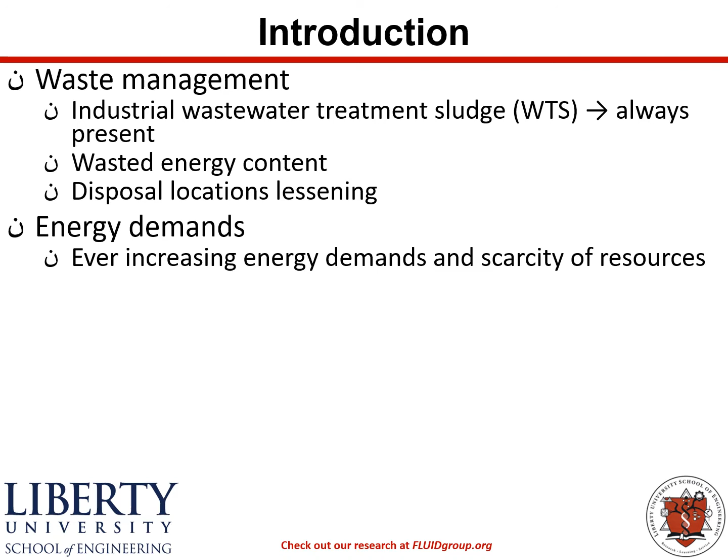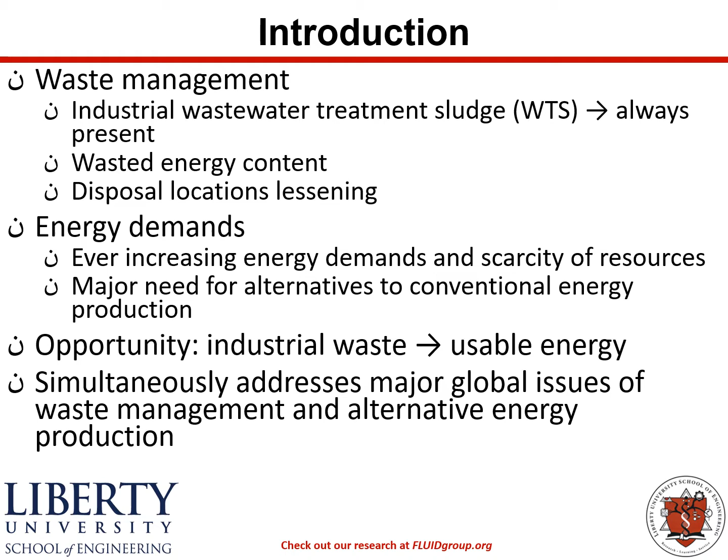Again, it should be no surprise that energy demands are another hot topic, with scarcity of resources, and we're always needing alternatives to conventional energy production. So this brings us to our main opportunity: industrial waste being used and converted to some form that would be a useful energy. This simultaneously addresses major global issues of both waste management and alternative energy production.

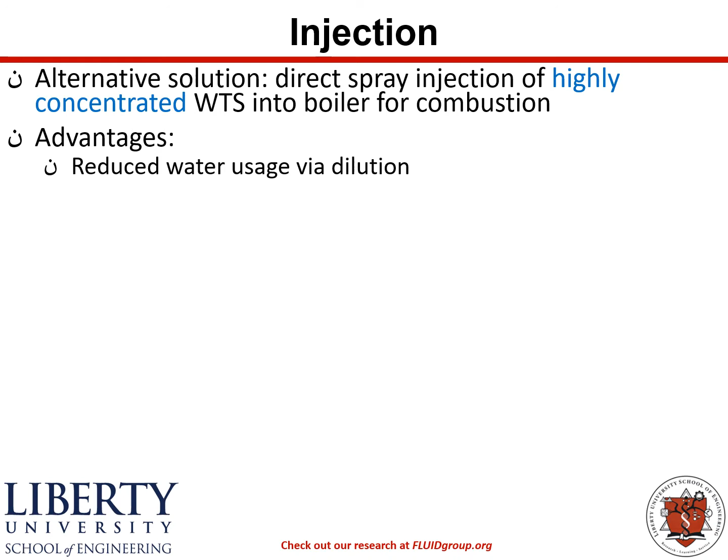Our solution to addressing these problems comes in the form of direct spray injection of highly concentrated wastewater treatment sludge into boilers for combustion. The advantages of this would include reduced water usage because we don't have to dilute the sludge to transport it from one location to the next, reduced fossil fuel emissions associated with that transporting, and obviously, as we discussed, we're simultaneously solving global issues. But it's critical that we have effective atomization, which would be...

...small droplets of this highly viscous wastewater treatment sludge. That would imply a high surface area to volume ratio for drying and combustion once these droplets were in an incinerator, say for example. But it's very difficult because the high viscosity of wastewater treatment sludge creates a large pressure drop, which restricts the flow and will result in poor atomization or larger droplets. The author has a long history of compressible non-Newtonian atomization studies, so we are well suited to attack this problem.

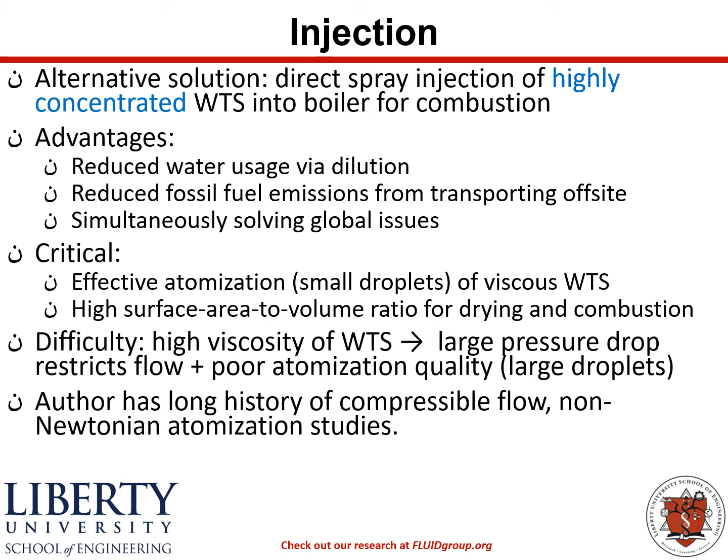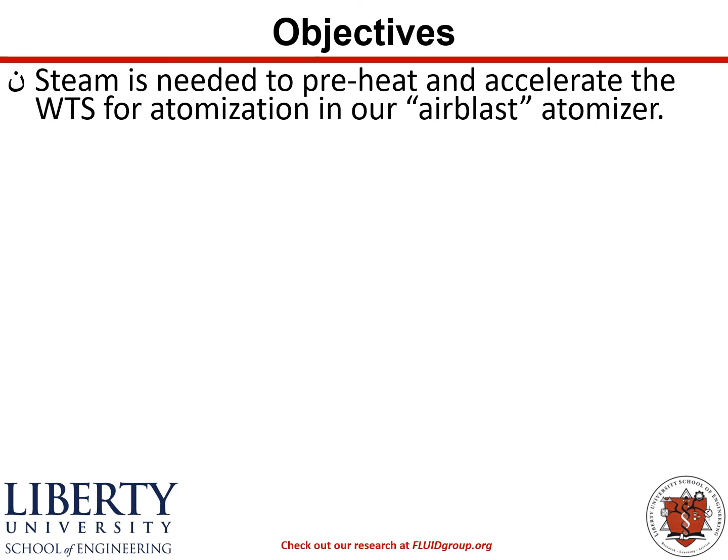Before we can discuss the objectives of this study, we must disclose the disadvantage of this technology. The main issue is that steam is needed to preheat and accelerate the sludge for efficient atomization in our air blast atomizer. However, the steam reduces boiler efficiency because we've already put the latent heat into water to produce the steam, and the steam is going to dilute the combustion reactants.

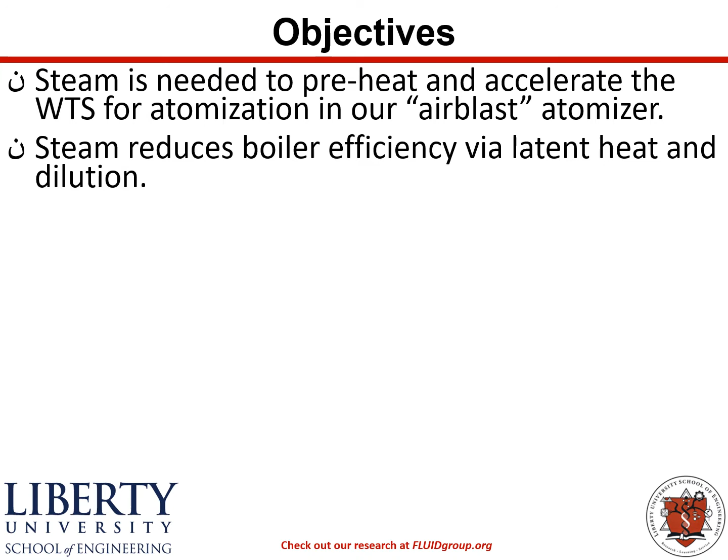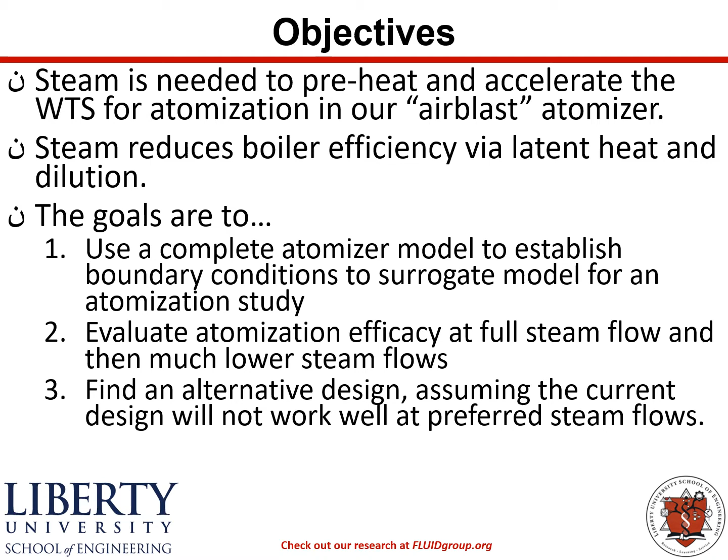So therefore, our goals are to use a complete atomizer model to establish boundary conditions to a surrogate model downstream of that complete model for atomization study, and to evaluate atomization at full steam flow and then much lower steam flow so that we can mitigate this boiler efficiency loss that we discussed. And then we look for an alternative design to this atomizer, assuming the current atomizer design will not work well at efficient atomization at preferred steam flows.

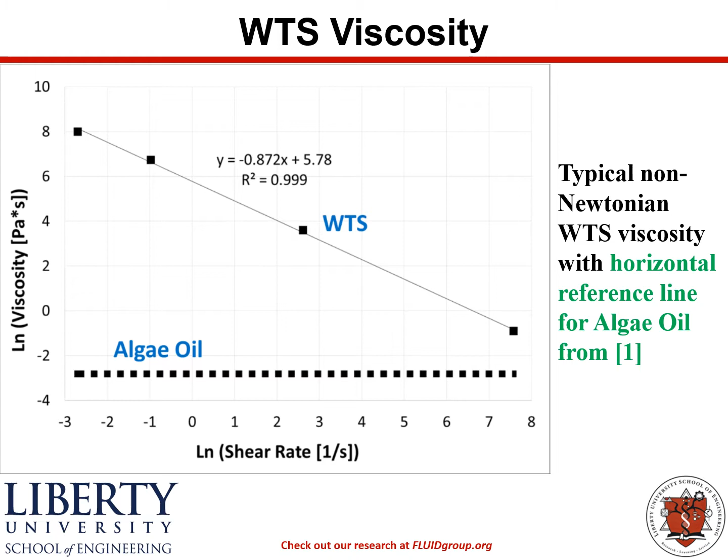The reference line, the dotted line at about approximately -3, is a reference line from algae oil from a study at reference 1. We see that across the entire range of plotted shear rates, the wastewater treatment sludge is many orders of magnitude higher viscosity than the reference algae oil.

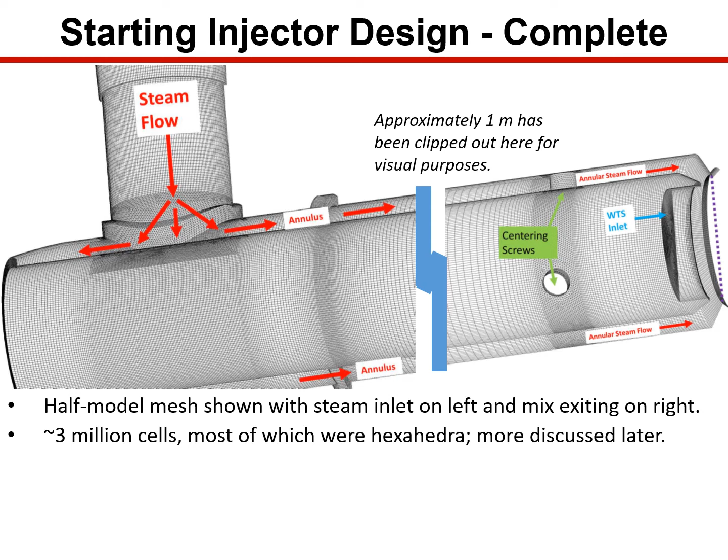I'll illustrate here what we're calling our complete model. This is a half model shown where the steam enters on the left in the vertical pipe, approximately vertical pipeline, enters the annular region and travels parallel to the sludge along the axis of the atomizer, and then the mixture leaves on the right. This particular mesh has about 3 million cells, most of which are hexahedra, and I'll be discussing more meshes in the future.

These TETs were converted to poly within Fluent 19.2. It's important to note that the sludge entry, where it says WTS, is much longer than what's shown on the right. I've clipped it off for illustration purposes, but it does travel the entire length of the atomizer. Also note the blue zigzag in approximately the center of the page, illustrating that 1 meter of length has been cut out of the atomizer design, again for visual purposes.

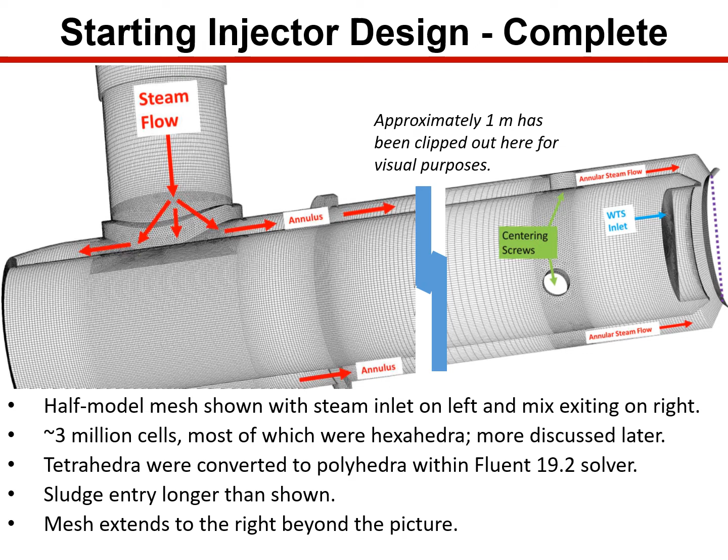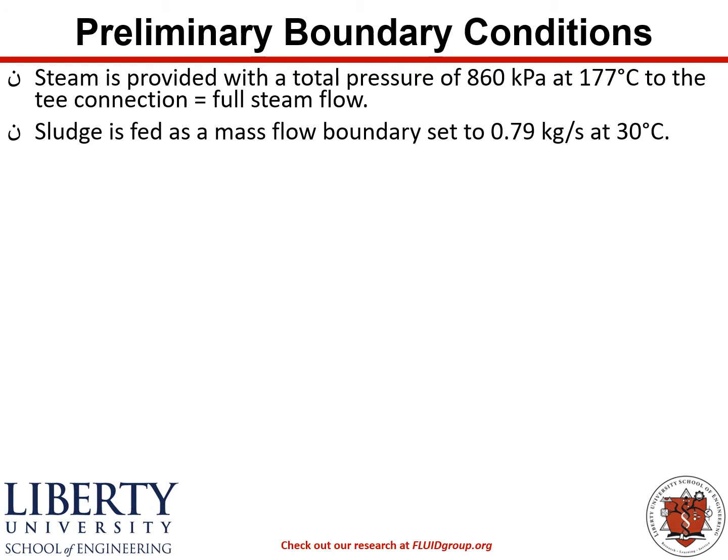I'll outline here the boundary conditions used in the study, and specifically I've called this preliminary because it represents the full steam flow case. For that full steam flow case, steam is provided at a total pressure of 860 kPa and 177 Celsius to the tee connection shown in the previous slide. Sludge is fed as a mass flow boundary at 0.79 kilograms a second, all at approximately 30 C.

The important length scales in meters are as follows. The steam inlet is about 0.031. The wastewater treatment sludge pipe is an inch Schedule 40 with an inner diameter of 0.027. The gap between the annular steam flow, inner and outer diameters, is 0.0037, and the outermost orifice diameter on the far right hand of the previous slide is 0.03 meters.

The resulting gas-liquid momentum ratio, M, is 0.47. All exterior walls are treated as adiabatic. The steel wall of the sludge pipe that's between the sludge and the steam is allowed to conduct heat, and the outlet to the right of the model was set to a pressure outlet at approximately atmospheric, to mimic the pressure inside of our boiler.

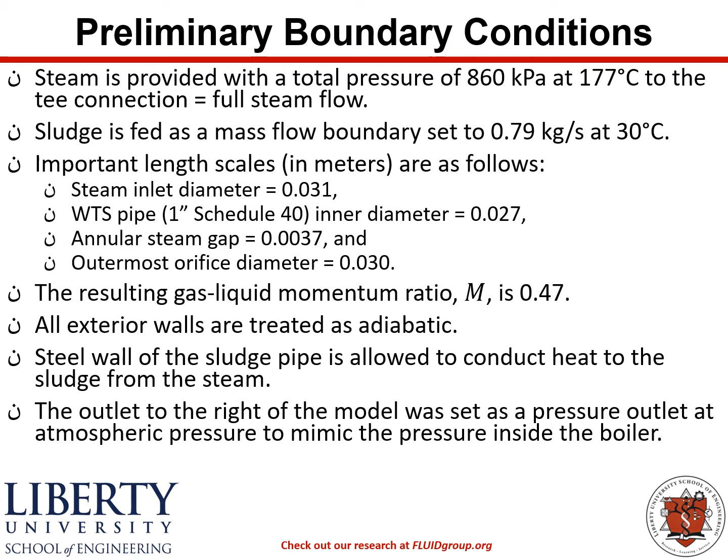The solution method will be outlined as follows. We begin with the compressible Navier-Stokes equations as our foundation. Those are well known and not repeated here.

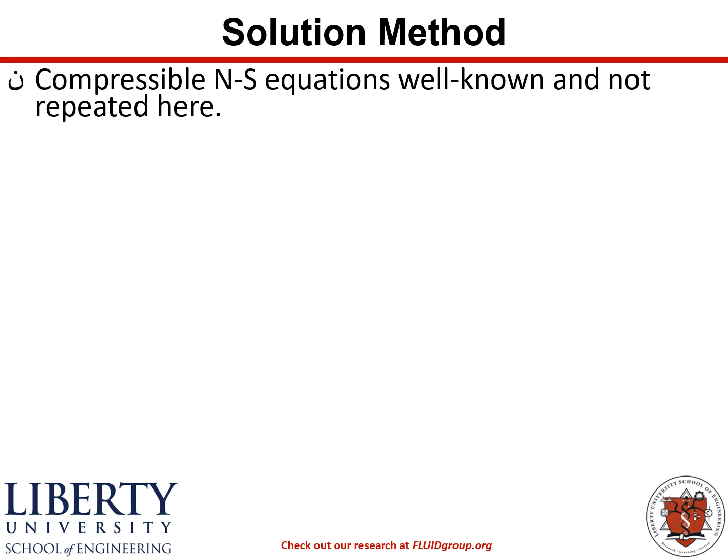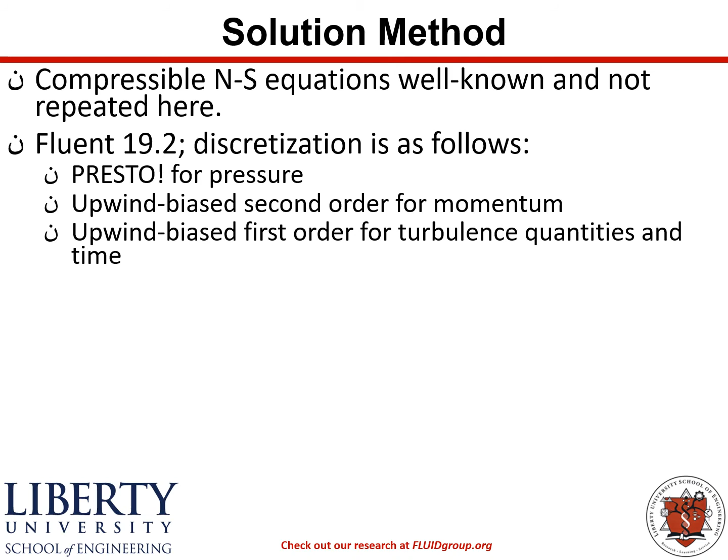Fluent 19.2 is used with discretization schemes as follows: Presto for pressure, upwind bias second order differencing for momentum, upwind bias first order differencing for turbulence quantities and time, piecewise linear interfacial construction or PLIC for volume of fluid interface, at a time step size on the order of 10 to the negative 7th.

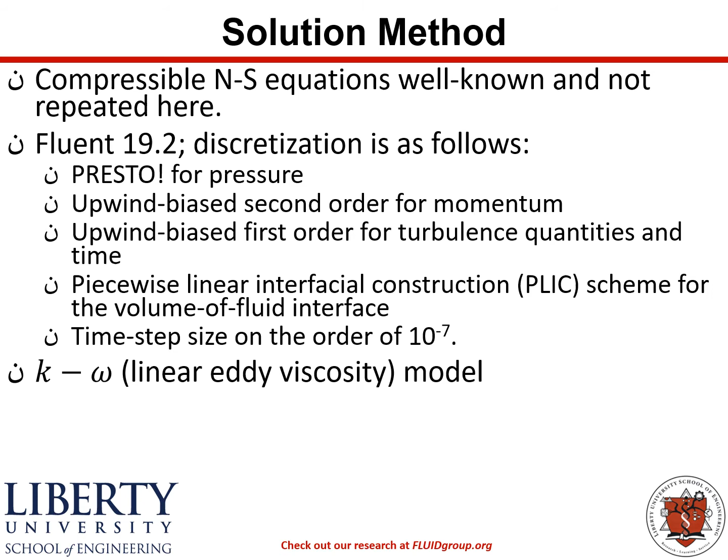The standard K-omega linear eddy viscosity model is used. While that model is far from perfect, it proves useful for this study. The ideal gas equation of state along with the Redlich-Kwong equation are both considered for our compressible gas.

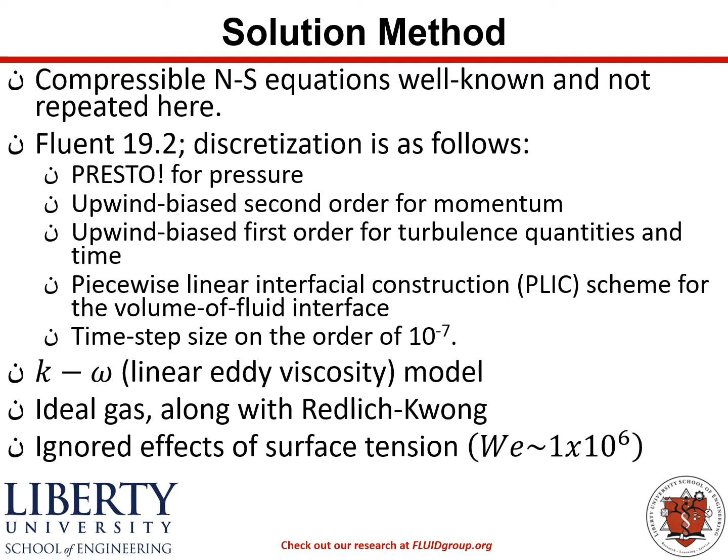And lastly, we ignore the effects of surface tension because our Weber number is on the order of 10 to the 6th. A typical instantaneous snapshot of Mach number on our full steam flow case is shown here, where the colors range from blue at 0 to red at 1 or anything greater than 1.

It's obvious that the steam reaches Mach 1 as it leaves the annular tip and begins to meet the sludge, and then as the sludge occupies some of the cross-sectional area that the steam has to share, the steam begins to accelerate further, again reaching levels well above Mach 1.

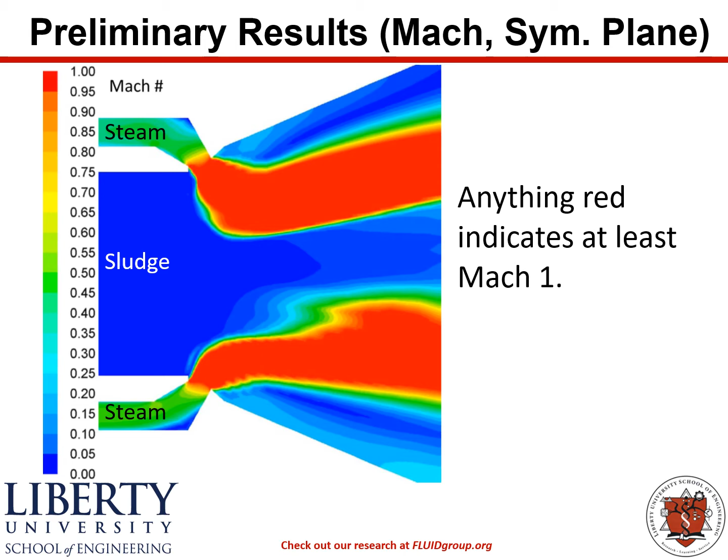Now we truncate the model shown in the previous few slides and cut out most of the steam inlet, and focus on the atomization region with a much higher mesh count.

The steam inlet conditions in all three dimensions, x, y, and z, are fed to the left-hand side of this slide as shown, and we feed their velocity, pressure, temperature, and turbulence quantities from our other model. This model has 17 million elements, and we're only studying 1/32nd of an azimuth with a base element size of 1.2e-4 meters in all three directions, right there where the sludge meets the steam.

And then just downstream of that, we do a once refinement to halve the element size in all three dimensions to an element size of 6e-5 meters.

And then downstream of that, we refine it again, cutting the mesh element length scale in all three dimensions in half to a mesh element size of approximately 3e-5.

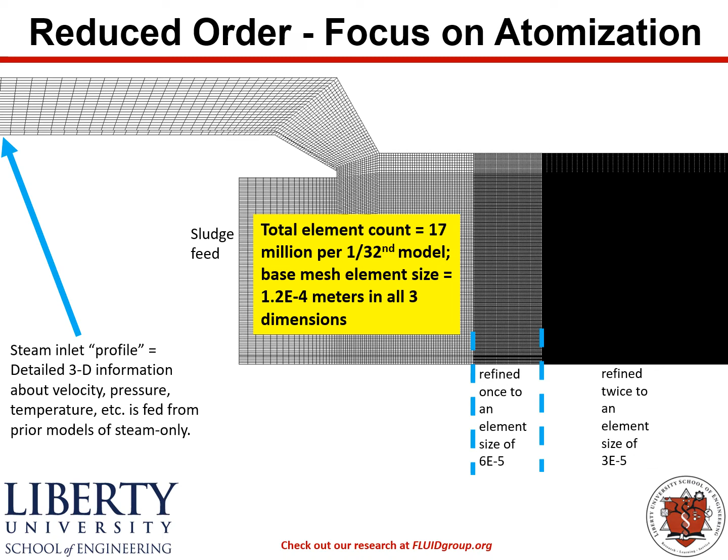Shown on this slide is an animation from the CFD studies at full steam flow, where green represents the interface between the liquid and the gas. The variable speed in the video is a result of variable time stepping in the solver, and I apologize for the confusion. What we see is this high-speed peeling of droplets off of the interface of the wastewater treatment sludge due to the high-velocity gas passing close to it.

Not shown on this slide is the Sauter mean diameter versus distance from the nozzle, and we see a log linear trend down to a Sauter mean diameter of about 0.08 millimeters.

Now the two downsides to this result: first, we see a nice azimuthal dependence where there's a 1/32nd repeatability in the droplets and the interfacial instabilities. That indicates that our model depends on the azimuthal repeatability, which means there are inaccuracies incorporated in the model. That's been addressed in my prior studies, and it is a downside to this model.

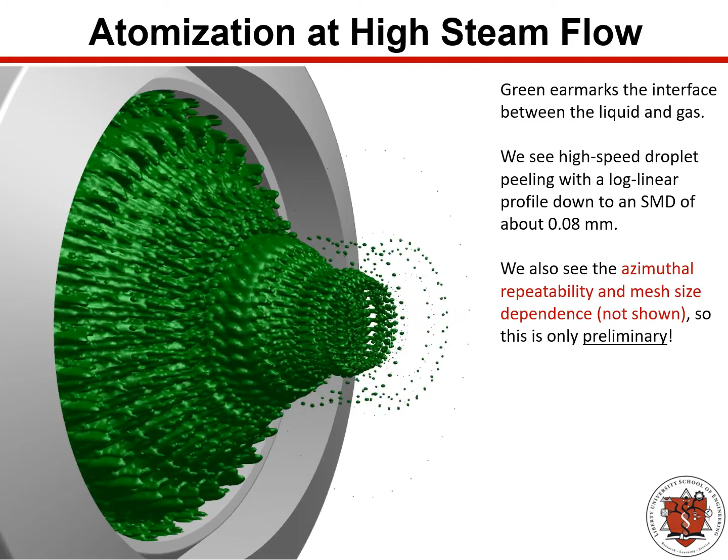Secondly, not shown here is the droplet size dependence on mesh size, which is well documented in the literature. Both of those are discussed more in the paper. And again, the goal here is just to get a preliminary droplet size, and we say that it's about 0.08 millimeters.

This animation, however, shows what happens if we cut the steam flow to 1/10 of the full steam flow used in our stock studies. Again, the green represents the interface between the sludge and the high-speed steam, and the variable speed of the video is indicative of the variable time-stepping routine in the solver. We see, again, high-speed droplets peeling off the interface between the two.

We also see some backflow about halfway across the span of atomization. This droplet size, however, is about 2 orders larger than that of the full steam flow, and the Sauter mean droplet diameter gets to about 6 millimeters. That is a volume average value, and you see there's a huge range of droplet sizes here, with a mostly uninterrupted core, followed by peeling off the outer edge.

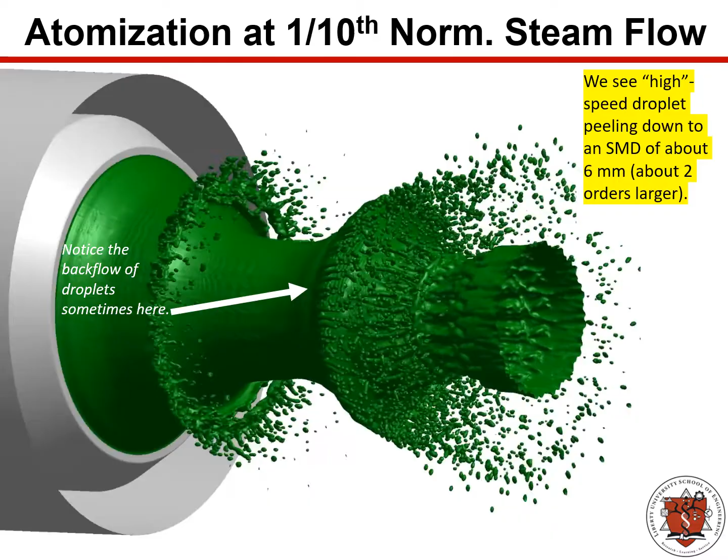So we showed that the droplet size increased by about 2 orders as we reduced the steam flow to something we would much more prefer.

So we introduced this concept of feed inversion, and that is our silver bullet for getting better atomization. This animation shows what happened when we invert the slurry to the outside and put the steam on the inside. So now slurry's in the annulus and steam's in the central pipe. Again, the green marks the interface between the slurry and the gas.

Instead of now a high-speed peeling across the exterior of the sludge, we see a peeling off of the interior because that's where the high-speed gas is housed. Now, the flow regime is very different. We see a radial and axial bursting event in between the high-speed peeling events.

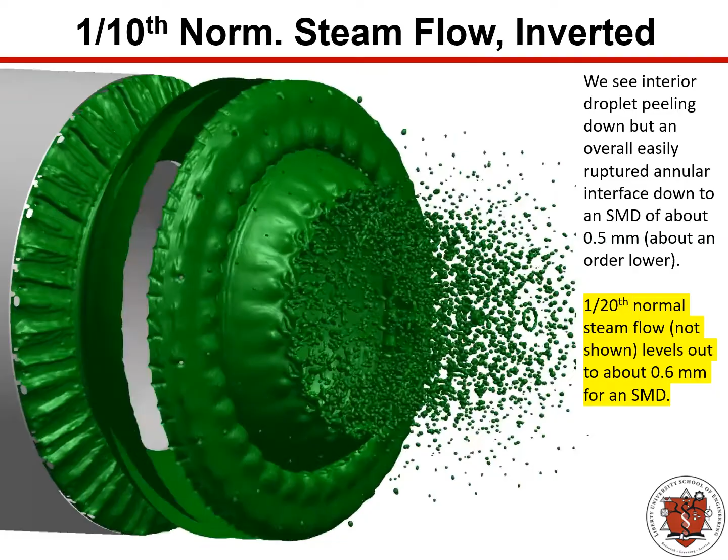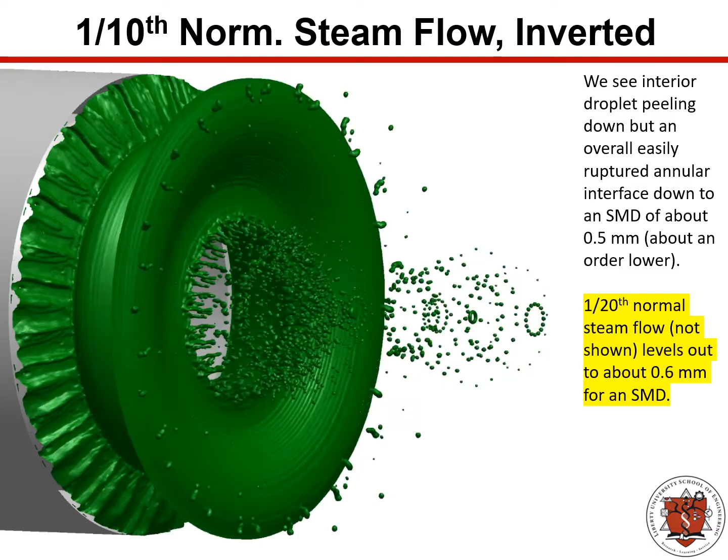So we have a much more uniform distribution of droplets because they are blasting in segments. The droplet size gets down about an order from where it was at the normal feed design. Instead of 6 millimeters, it's down to about 0.5 millimeters. Now at 1/20th of the normal steam flow, this is 1/10 in this animation, but 1/20th was also considered. It's not shown, but it shows a very similar regime, and it levels out at approximately 0.6 millimeters of Sauter mean diameter.

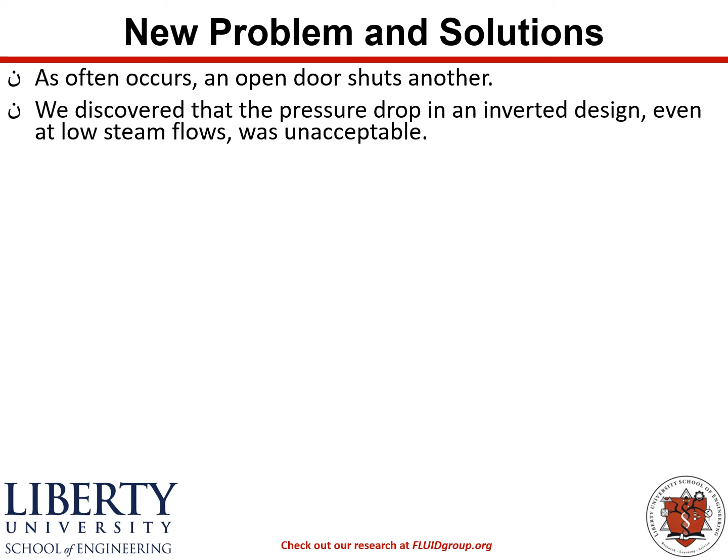As often occurs in real life, when one door opens, another one shuts. We discovered that when we move the steam to the central pipe and the sludge to the annulus, which has much less flow area, the slurry pressure drop was unacceptable.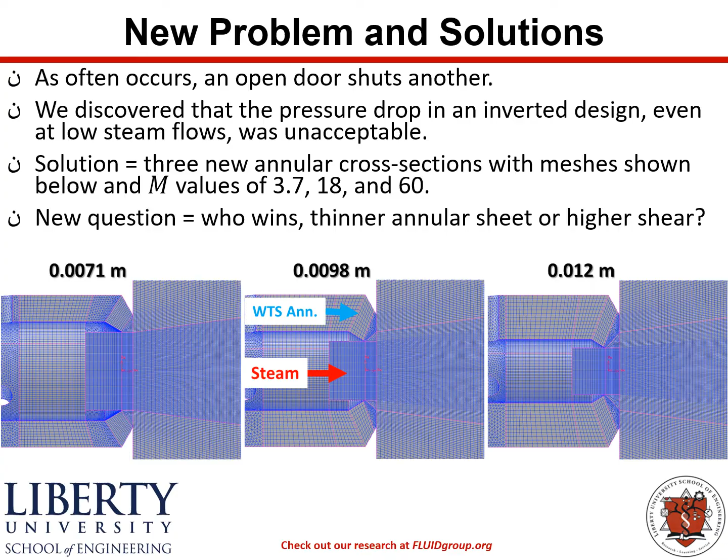The fact that the annular sheet is thinner, or the fact that there's higher shear on the central pipe of the steam when that annular sheet gets thicker? You see that they cannot be independently adjusted. As we thin the annular sheet, we also had less steam shear, and vice versa.

This animation illustrates what occurs when the sludge annulus is the smallest of the 3 that we tried in this new batch of cases. This is with 1/20th of steam flow, and again, the variable speed of the video is indicative of the variable speed time stepping in the solver.

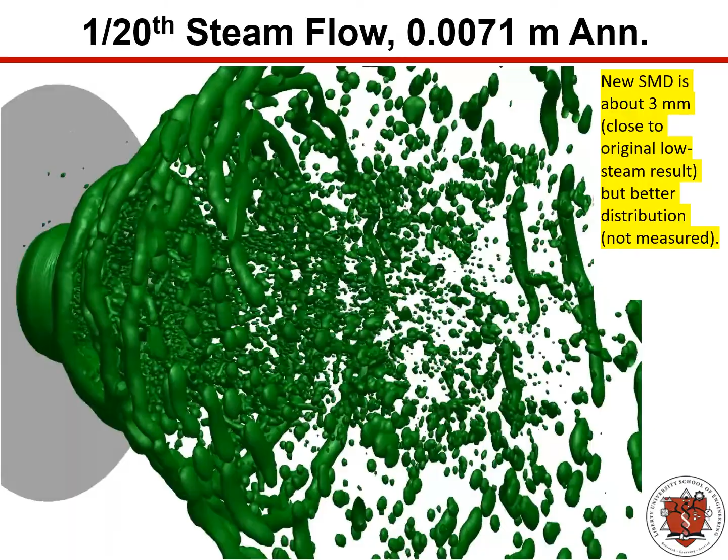You see a much more uniform distribution of droplets than we've had to date, and our new Sauter mean diameter at the very end of the domain is approximately 3 millimeters, which is close to the original low-flow steam result, which is disappointing, but we do have a better distribution of droplets.

One thing I set forth to accomplish in the paper was to consider the effect of various metrics by moving the steam pipe diameter and the sludge annular thickness from values of high to low. On this plot, we see steam pipe diameter on the abscissa, and sludge differential pressure coefficient of variation on the ordinate. What we're measuring is the sludge differential pressure changing in time. So COV is the temporal standard deviation divided by the mean.

Toward the left side of this plot, we see, generally speaking, high gas shear, high sludge layer thickness, high gas-liquid momentum ratio, and low sludge internal shear. Whereas on the right side of this plot, directionally speaking, we see low gas-liquid shear, low sludge layer thickness, low gas-liquid momentum ratio, and high sludge internal shear.

Although there are 3 data points and only 3, I do have a correlation. I call this a correlation. I do have a fit with the power law of R squared of 1. What we're trying to illustrate is the effect of that competition between sludge layer thickness and steam shear, and how that affects the sludge pulsing.

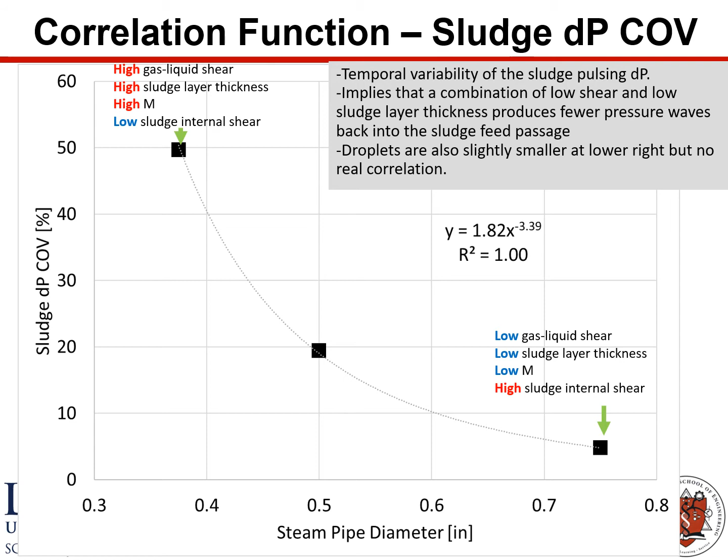So we see that the combination of low shear and low sludge layer thickness produces fewer pressure waves that travel back up the sludge feed passage to the mass flow inlet. Now, with this design, we see that on the right-hand side of this page, droplets are also slightly smaller, but there's no real correlation because there's not enough variation to draw a correlation.

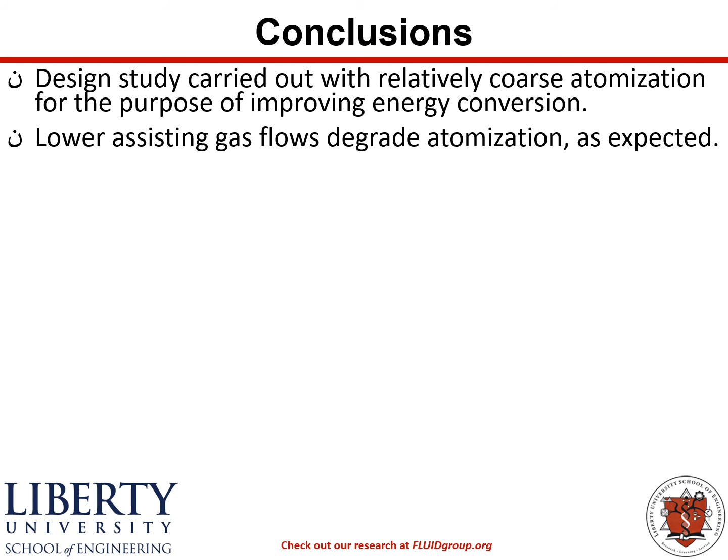In conclusion, I carried out a relatively coarse mesh atomization study for the purpose of improving energy conversion. I found that lower assisting gas flows degraded atomization. I expected that. Inverting the gas and liquid feeds, however, dramatically improved atomization at the low steam flows we sought. The resulting pressure drop on the slurry side, however, that penalty could be mitigated by larger steam annuli. The thinnest sheet, that is the slurry annular sheet, and the slowest steam, which would produce the lowest gas-liquid momentum ratio, produce slightly smaller droplets than other designs, and much easier pressure control.

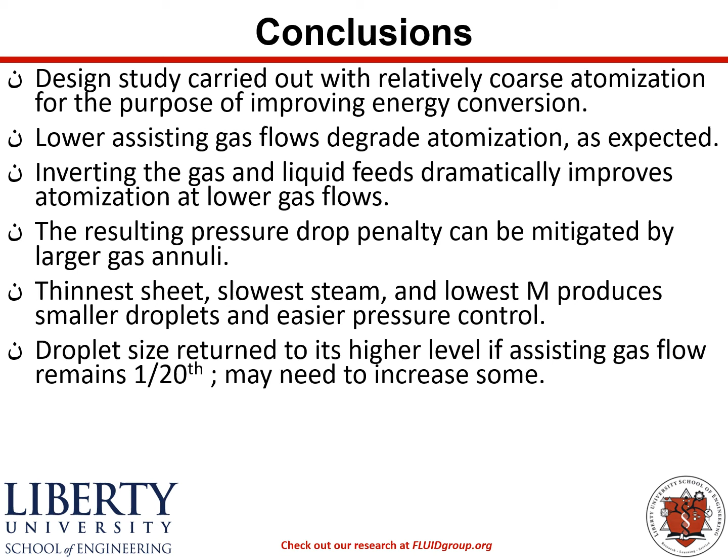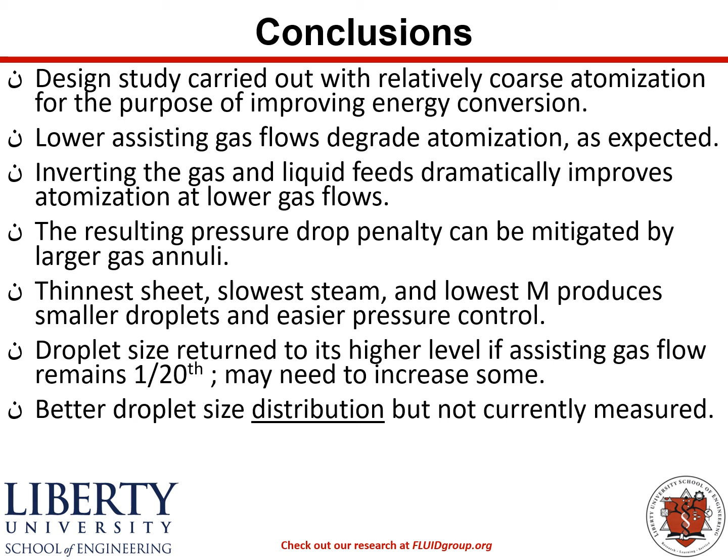The droplet size, however, returned to its higher level, what we didn't want, if the assisting gas is kept down to 1/20th of the original flow. That may need to be increased some should we want high-quality atomization in our steam boiler. What we found was that this new design produced a much better slurry droplet size distribution, but that is currently not measured in our CFD study. We want to do so in the future.

Here are 3 references for your consideration. There are more in my paper. I encourage you to review that.

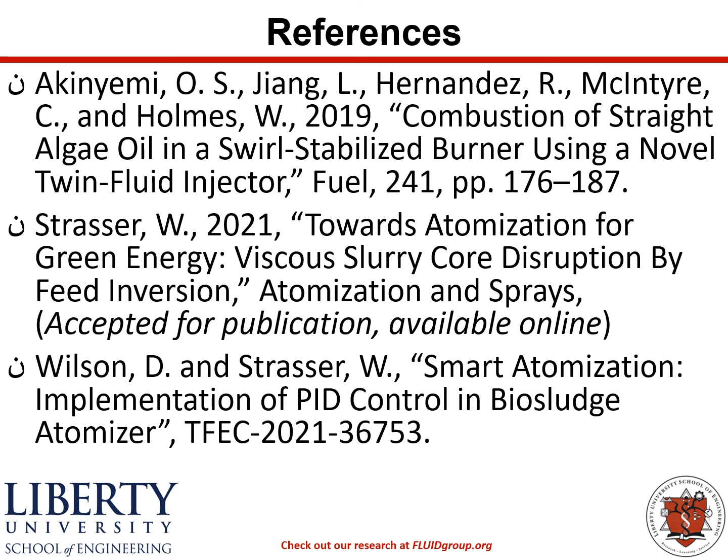I'd also like to bring your attention to the last item on this slide, a paper that Daniel Wilson and I are presenting at this conference that considers PID control for smart atomization, and what we're trying to accomplish is maintain atomization quality in times of highly variable sludge viscosity. Thank you for your time.